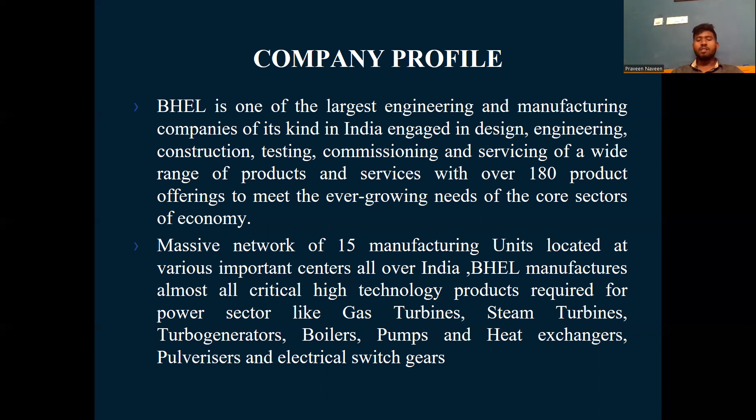BHEL has a massive network with 15 manufacturing units across India. It is very specialized in manufacturing electrical equipment, electrical transmission equipment, turbines, engines, and more.

Brief history of the company: BHEL was first proposed to start by Sir Visvesvaraya when the Mysore province was started. It was then started by our Honorable Prime Minister, Dr. Jawaharlal Nehru. The BHEL Yeshwanthpur unit specialized in engineering, manufacturing, supply services, and power plant equipment manufacturing, with main components being generators and boilers.

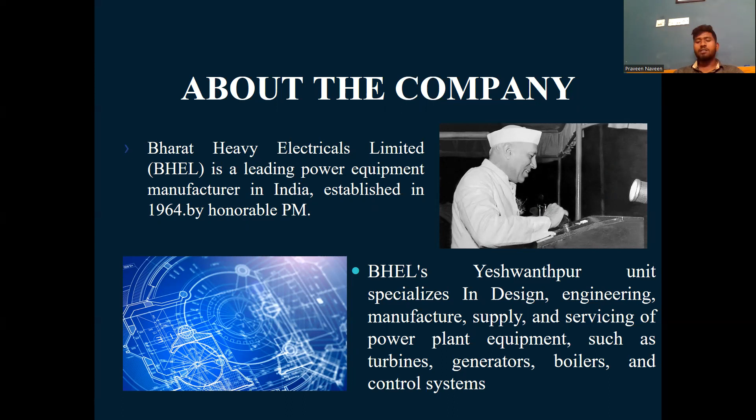Next is the work scope of BHEL Yeshwanthpur unit: serving a wide range of power plant equipment to power services and power transmission, including steam turbines, generators, gas turbine generators, hydraulic turbine generators, boilers, heat exchangers, and control system instruments.

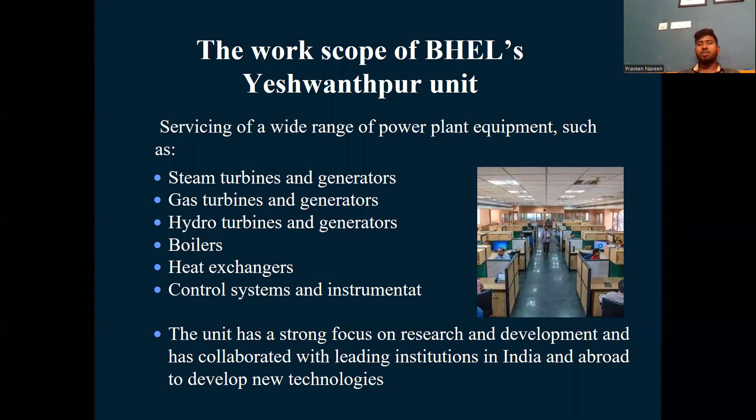All these systems have to be controlled, so controller units are also generated within BHEL itself. BHEL focuses on development and research, with significant effect on important developments. It has collaborated with groups like IITs and abroad development technologies, so R&D is very useful.

Next, the contribution of BHEL to the country. BHEL is a government company run by government administration, so it is useful and generates economy for the country. First is power generation capacity, which has increased. Then employment generation — the company has a big share of employment, so employment increases, and GDP will also increase.

Infrastructure development: since it's a government company, when government develops similar projects, infrastructure is provided by BHEL itself. Then technology transfer and engineering — they pick the brilliant minds of India, so technology transfer and indigenous development occur.

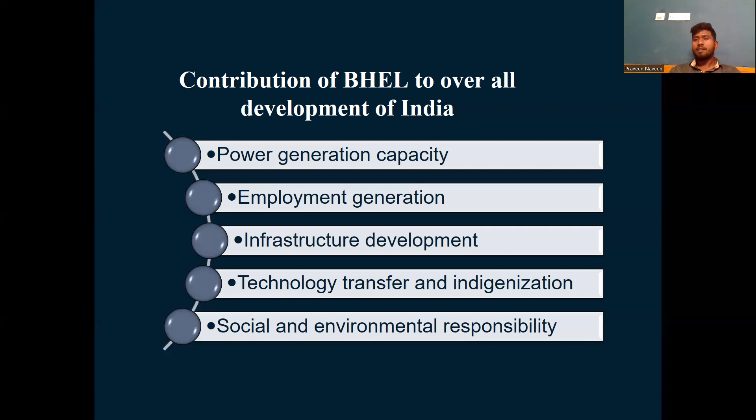Next is social and environmental responsibilities, which are main factors every company has to focus on. BHEL has a very good impact on social and environmental responsibilities, providing many environmental supports to India.

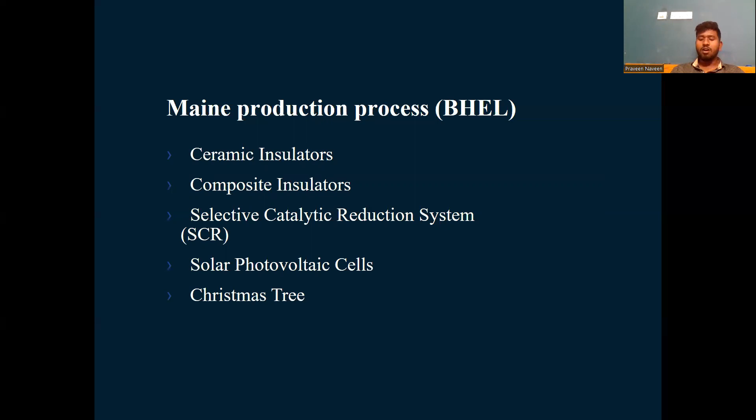Now coming to the main products and production processes: ceramic insulator, composite insulator, selective catalytic reduction, photovoltaic cell, and Christmas tree. The Christmas tree here is not the tree used for Christmas — it's an oil filtration tree, and components of oil filtration trees are produced in BHEL, not the whole tree.

The first process is manufacturing insulators. The insulator manufacturing process starts with raw material import, mainly China clay and normal clay, along with some alumina acids and other secret ingredient components.

All these raw materials are placed into a ball mill, which is a turning mill that rotates the raw materials while mixing them with water. The output of the ball mill is called slurry.

The slurry then goes to the tanking process, which involves big huge tanks storing the slurry. Next is the filtering process with pressure filtration, where it is put under high pressure and pressed, removing excess water.

Next is the pug mill, which measures and cuts according to the given measurements. The pug mill cuts the material, and it takes about 3 to 4 days to cool down and harden enough for the vertical turning.

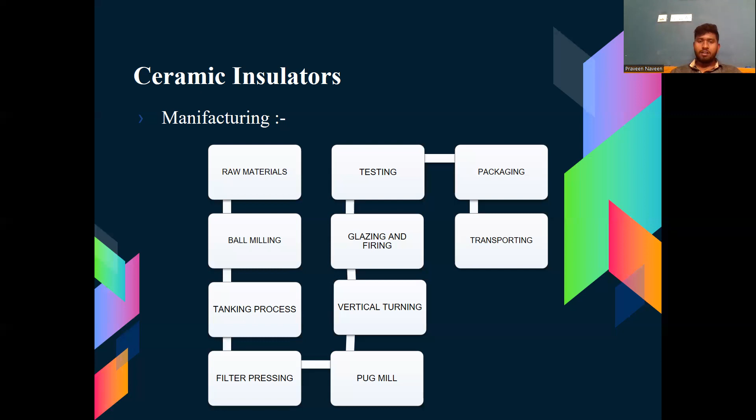Next is transportation. Wherever it is ordered, that will be transported to the company or the ordered customer.

The next thing is composite insulators. Let me speak about what is an insulator. An insulator is a device used in transmission of electricity, where one end is provided with electricity and the other end has zero volts or zero electricity, so there is no transfer medium of electricity. Because of that property, insulators are used in transmission lines.

So the next thing is composite insulators. Composite insulators have the process of raw material cleaning, crimping, pre-coating, injection molding, deflashing, and testing.

The electrical insulator made up of composite materials is very lightweight with superior strength and durability because of rubbery and plastic substances, giving higher resistance. The raw material is rubber, and it has to be cleaned because minute particles of dust or metal will be present, and that dust or metal will act as a conductor, so it has to be removed. Crimping involves cutting, chopping, and preheating.

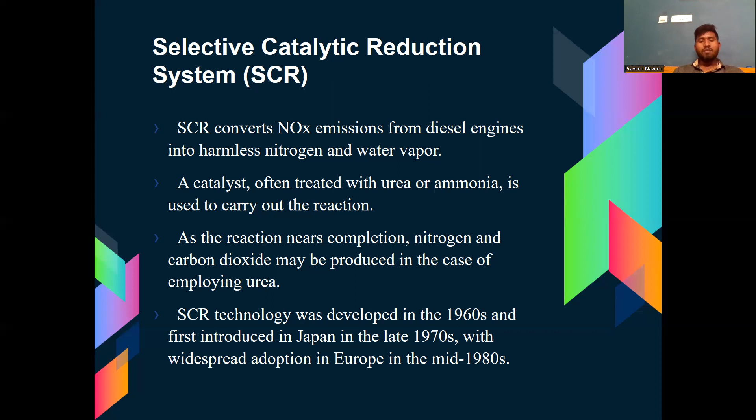Then this is the production process. The first thing is the kneader mixture, which has clay and secret ingredients including ammonia in it, and then it has to be unloaded into small tubs and stored.

Subsequently there are machines which make expanded steel metals and pores. The pores are made on the steel sheets by expanding it - this is expanded steel metal.

Then it is given to one production unit that came from Germany. Germany made this machine, which pulls out the steel metal, and the kneader mixture element is poured upon it. The coating is done on the line, and the coating is dried by IR rays.

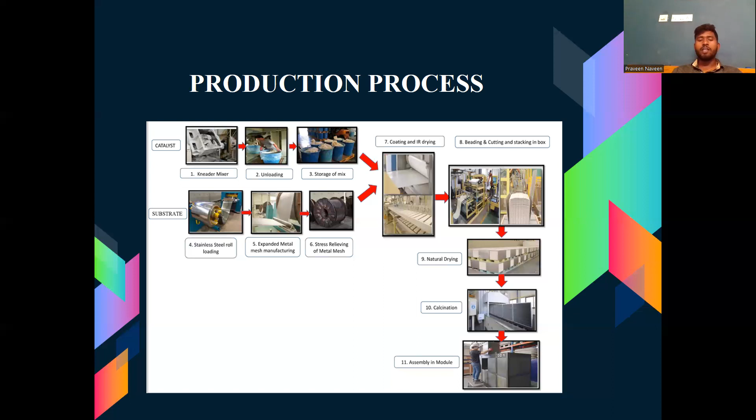Then it goes to cutting cutters, which cut it according to the shapes. The cut plates are organized by robotic arms onto one tray. Then the tray is taken up and placed in a row. Then this process is done, and it has to be waited and cooled down so that it can then be transmitted.

These are the main factors in the SCR process. The kneader mixer is one of the main factors, mixing all the key ingredients, and the expanded sheet metal gives durability to the catalytic converter and holds the shape. The coating line gathers these two elements and holds them together.

Then bending and cutting - the gas has to pass over the catalytic converter, so it has to be bent. Some gas goes through the catalytic converter and some gas passes, and this layer has to be done so that it converts NOx into water vapor and nitrogen. Next will be testing and packing.

Testing is very important because whether the product is good or not, it has to be tested, and whatever you make, it has to be a perfect one.

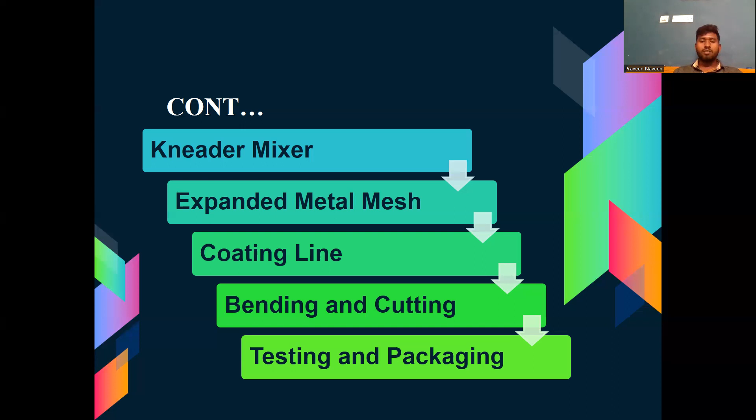Next thing is solar photovoltaic. Solar photovoltaic is, as we all know, solar energy is a renewable energy which can be used in any situation because energy is abundantly available. So the solar energy conservation system maximizes efficiency and effective solar energy capture and utilization.

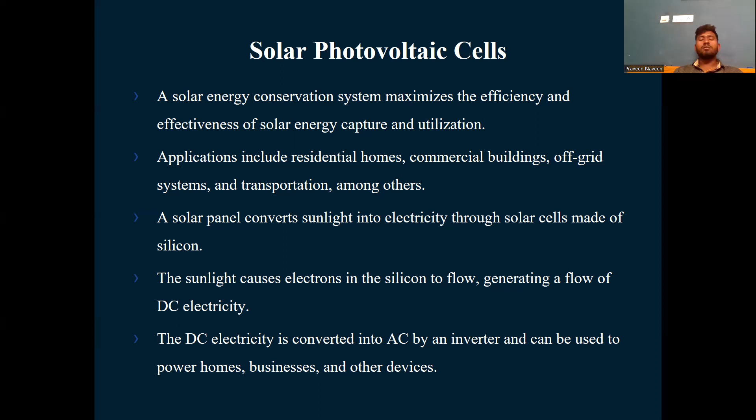The applications include residential homes, commercial buildings, off-grid systems, and transportation among others. The solar panel converts sunlight into electricity through solar cells made up of silicon, and the sunlight causes electrons in the silicon to flow, generating a DC voltage. The DC electricity converts to AC with an inverter, so it can be used by home, domestic, and business users. So all these are the uses of solar energy and solar benefits.

So this is the production process: laying up and inspection. First is importing - we don't have a proper production unit for solar cells, so solar cells will be imported. The solar cell will be laid up, and every solar cell is connected with steel wiring in a series connection, because it has to give a very high amount of energy output. Then lamination is pouring out the lamination material on it, and it has to be dried out.

Next thing is framing, with aluminum framing. They use 3 by 7 feet frames which are fitted with laminated and inspected solar cells, and all the required components will be added in the framing.

Then it goes to testing, which has important features: voltage testing, current testing, and sunlight testing. Sunlight testing is providing an artificial sun energy, and checking how much energy unit is generating from a single solar panel unit.

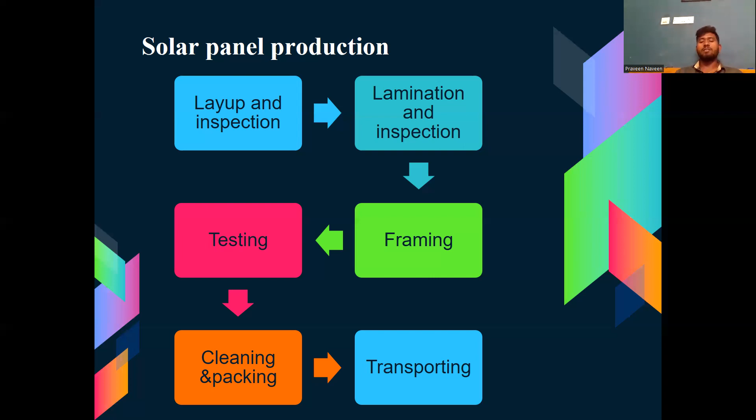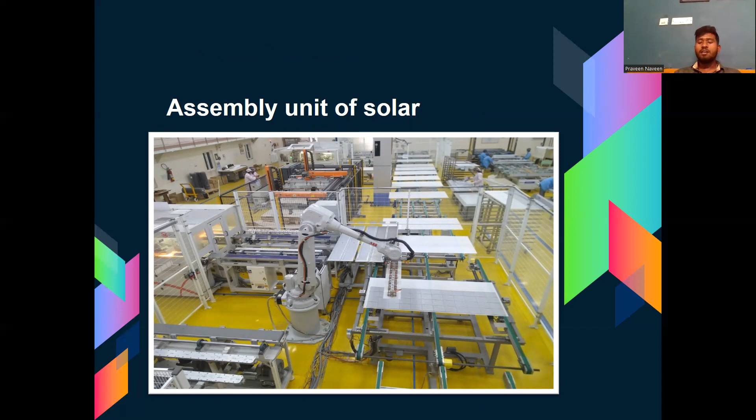Then what is the task done by us as interns? So I watched the company's internal production of a variety of products. The company has a variety of products, and I have gone through all the processes.

The brief impact on me is that the process is big, but it is very soft and smooth going on its way, with no other influences on it. So it is very soft and smooth, which makes it